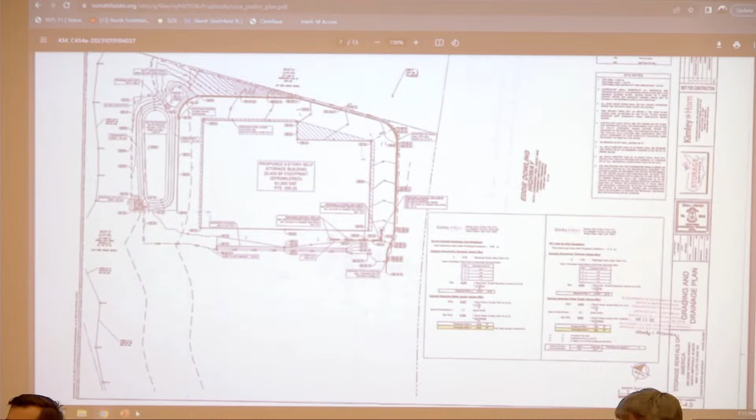Okay, thank you. And then I had one other question. I just wanted to understand a little more about what the gentleman said about the fire marshal and water, but I didn't understand the nature of the possible conflicts, for lack of a better word. It sounds like there's something that might be precarious, but the fire marshal said no, it's not a problem. I thought there was something about no water on site and a possible problem, and I didn't understand what that was.

The new building is going to be sprinklered for fire suppression. There's not an existing main that's easily accessible for that new building, so as part of the fire suppression requirements, to make sure there's adequate fire protection, the architect is going to install a cistern, a large water tank, inside the building. That will meet the fire suppression needs immediately.

Thank you, I missed that part. I was wondering how it was getting resolved, I didn't hear. Oh okay, that's why I'm here, thank you for the clarities. That's great, those were the questions I had at this moment.

You raised a question about one of the major concerns, which was this location being in the groundwater protection overlay. Hopefully to allay any concerns, your code has a separate section dealing with the overlay that requires special use permits. In zoning parlance, that's usually the easiest relief to get, basically a permitted use for the zoning board to review. But in this instance there's a specific list of concerns and standards that have to be met, and the chairman was very certain that we met all of those requirements. So to the extent that remained a concern, we did get zoning board approval, and all of those standards that had to be met were addressed.

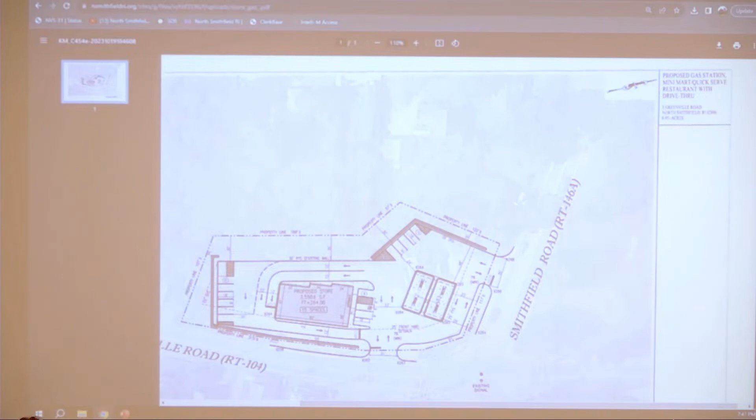As Mark called out, this would need your approval, and it would also have to go to zoning as a gas station convenience store, requiring a special use permit and some dimensional variances. Historically there was a drive-through there - if you look on Google, it's still there - so we may have some legal discussion on what relief is needed, but that's all in the zoning area anyway. Phil, maybe you can walk through the program you've outlined in these plans.

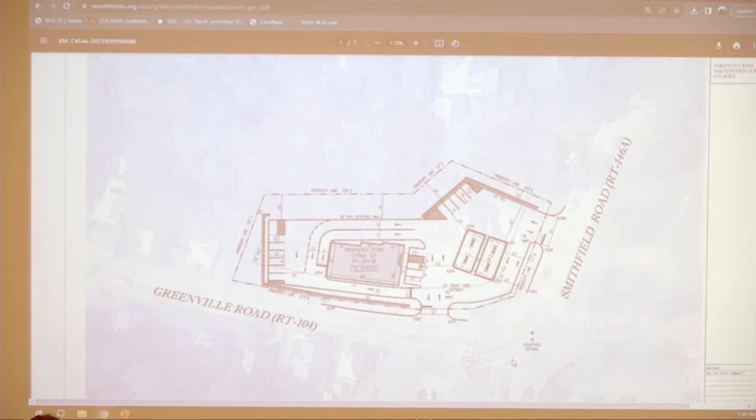I'd like to walk you through the concept sketch. This plan was prepared solely based on available information we've had to date, local GIS, Rhode Island GIS. We've not released survey yet, so what you see here is what we think we can construct. Obviously we would need to confirm through the means of master plan and so on.

Those of you familiar with the site know there's an existing retaining wall about 30 feet off the rear lot line. In front of that, where the structure lies, it's pretty much all asphalt, all the way from Smithfield to Greenville Road, particularly along the frontage of both streets.

There's also about an 8 to 9 foot grade change between what we're showing as proposed curb cut on 146A and this location. Through a number of iterations that Mark has alluded to, we were showing curb cuts in various places, and ultimately we're proposing them largely where the existing curb cut is on 104, with another one over on Smithfield Road.

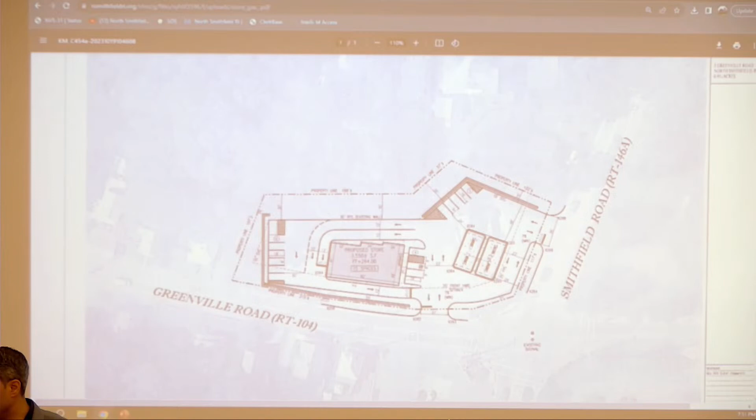Comments from the board?

I just wanted to name some concerns I hear from residents over the years. One consistent concern I've heard from people abutting such commercial endeavors is the brightness of the lights and how that impacts their home environment. I've heard that about Subaru a lot because of the lights, it's like a big car dealership. I wanted to name that because I know this area, like probably most of us do, and there's houses all around it.

Another discussion the chair, Gary Pilardi, who's not here tonight, and I have tried to promote over the years is the idea of the benefit to the community when something like this is built. Right now there's that storage place being built across the street, then there's a strip mall and a CT gas, so it's a lot of commercial and a lot of impervious surfaces.

If I think about communities that at this phase of development want to build in benefits, it would be things that soften the environment and make it not so concrete everywhere, especially thinking about heat islands and extreme heat in the summer. Having all that concrete and impervious surface, I'd be very interested in how that environment can be softened and greened. Those are my concerns off the bat, but I'll hear what anybody else has to say.

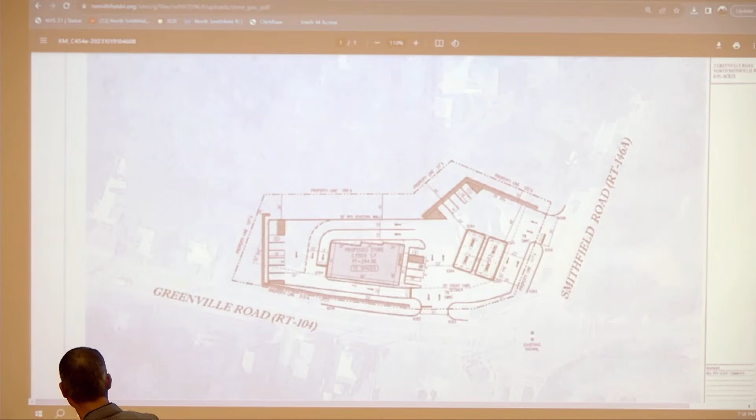So although be it, as it's shown, we don't have the requisite landscape width along the frontage, from an effective standpoint there's zero here today. But if you were to take from where we're proposing the curb line, which is pretty much at the existing, just behind the shoulder line, all the way into the site, you could have upwards of 15 to 20 feet of landscaping, although half of it might be within the right-of-way, or a fraction might be within the right-of-way. Or we can look to maintain or increase sidewalks. So to your point, in terms of the environment, I wouldn't be surprised if this ends up being a reduction of impervious area. However, with that being said, because of the use, we'd still be applicable to robust stormwater controls through DEM.

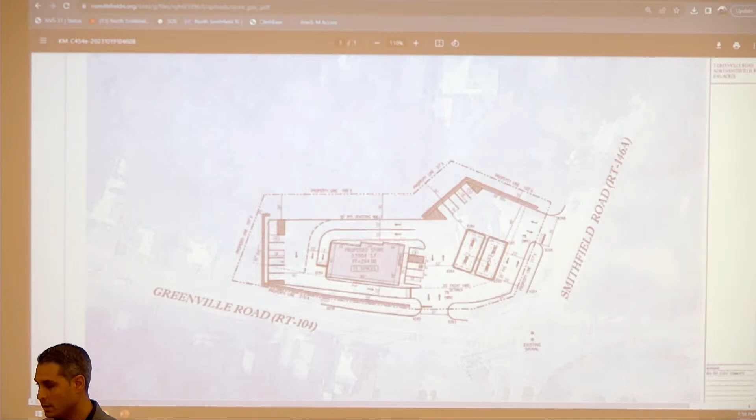I also wanted to name that on this plan, it shows trees across the street from it, but that's now the storage place. I was just pointing that out in case anyone saw that and it seemed like it wasn't consistent with what I was saying. It kind of underscores how unattractive that area is, and how in some ways it's a gateway to North Smithfield, but it's not very attractive.

It already sounds like you're minded that way, but I just wanted to emphasize that it feels like an opportunity for redevelopment, something more appealing and respectful. If you look at that, the houses are right up against that area. So I want to be mindful of the people living next to there, because the beef barn was a pretty low impact place. It didn't have big lights, and it was like an old favorite of the town.

So this concept and type of development is different in nature. I just feel like the more such a development can give back to the community, that will be like a reciprocal kind of relationship. So, thank you.